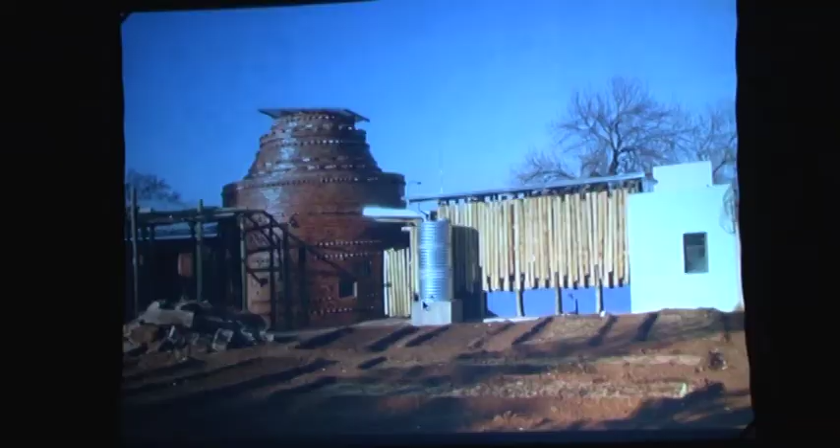And then this brickwork was a very interesting process, where what I did was take images, ideas, etc., and then met with the bricklayers and discussed how we could do just ordinary old stock brick differently. And then they came up with ideas of patterns or ideas of how they responded to that. So the drawing was done, but how it landed up being was ultimately controlled by the makers.

And then the little sort of quiet courtyard from the therapy space, that one sort of point of rest before you go and join the rest of the fray.

Now the women's jail is part of the, it was a jail, and it is part of the constitutional precinct in which the Constitutional Court is. It's called Constitution Hill. So this is a view from, Constitution Hill is conceived of as a human rights campus. So it houses various prisons.

I just want to say that there you see the kind of city. If I show you, that area there is Constitution Hill, with the green houses of the Randlords historically, with this kind of green mass, and then that hill, which is where the prison is and where the old fort is, the kind of watershed of Johannesburg and of what we call the Witwatersrand.

So if we go in a bit closer, that is the women's jail with the new additions that I'll speak to. That's the old fort, which was used.

The English imprisoned the Boers in here originally, but then its later history was that people like Nelson Mandela were imprisoned in this as a prison, but in those are the ramparts. And then that structure over there is the new Constitutional Court, and that building known as Number 4, or historically known as the Native Prison, was a notoriously brutal prison housing black men, mostly political prisoners, and just awful things happened there, but it is now a museum.

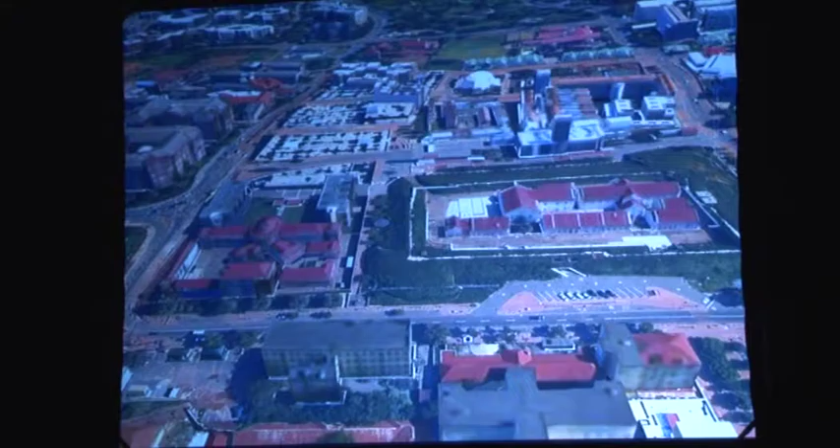So this whole place is the kind of campus of human rights. For example, the Gender Commission and various human rights commissions are housed in these different spaces. What I'd like to do is read to you from Joyce Piliso-Seroke, who is an ex-prisoner. She spent time in the women's jail.

The women's jail is a very strange place because it's described as a fine example of English prison architecture. Now, what a fine example of prison architecture is, is a bit mystifying to me, but nonetheless, as an architectural edifice, it's very beautifully built with beautiful brickwork detailing, etc. But it is better known as a place where women anti-apartheid activists were unjustly imprisoned.

Through this project, the jail is transformed from a place of oppression and brutality to a place where human dignity is restored. So I want to just read to you what Joyce, who was imprisoned there and then later became one of the commissioners of the Gender Commission, wrote, as she then used the office buildings that we designed, inserted into the building.

It is ironic that every day since the Commission on Gender Equality moved to Constitution Hill, I walk through the same entrance of the women's jail that I walked through on that fateful day in 1976, when I was detained under Section 10 of the Internal Security Act.

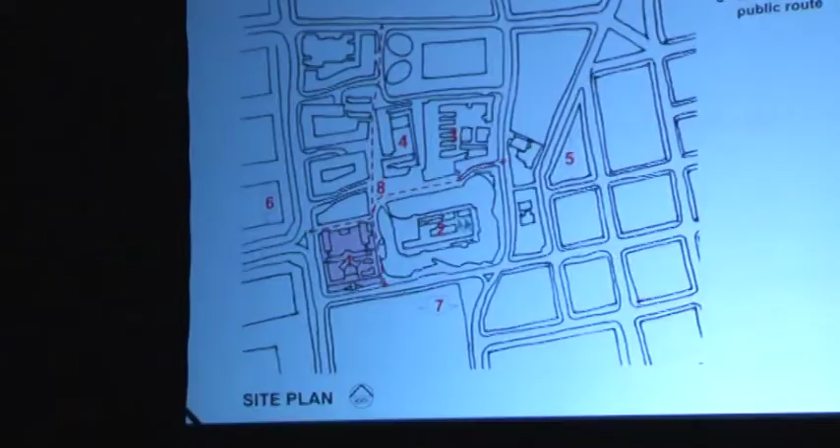So that is a plan of Constitution Hill. There is the Women's Jail, the fort, the Constitutional Court, and these are the kind of major axes through at an urban level.

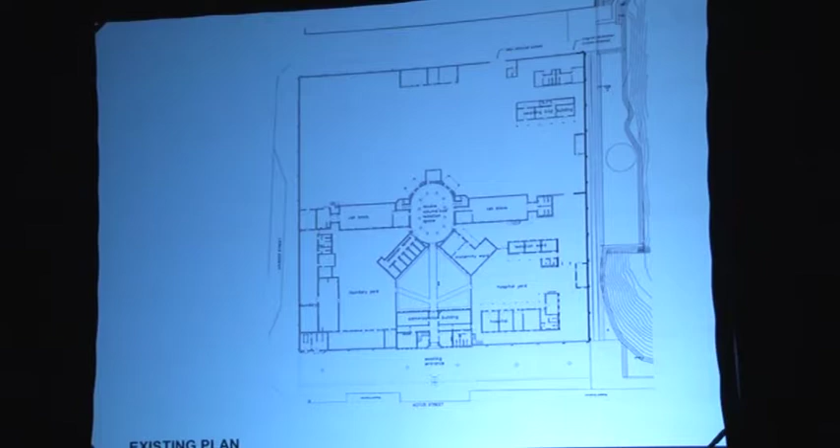Now, this was also one of the important projects done post-94, where there were kind of earmarked key places that were developed as urban regeneration programs. So Constitution Hill was one of them, the Nelson Mandela Bridge, Kliptown, which marked the site where the Freedom Charter was signed. These all became quite important sites of memory and public buildings, though perhaps the public buildings came too quickly. But it was very important to mark these places and use that process to try to bridge that buffer zone, that gap between Soweto and Johannesburg, and connect them into one city. I think it was an incredible time, really, and to work on this building was also an amazing honor.

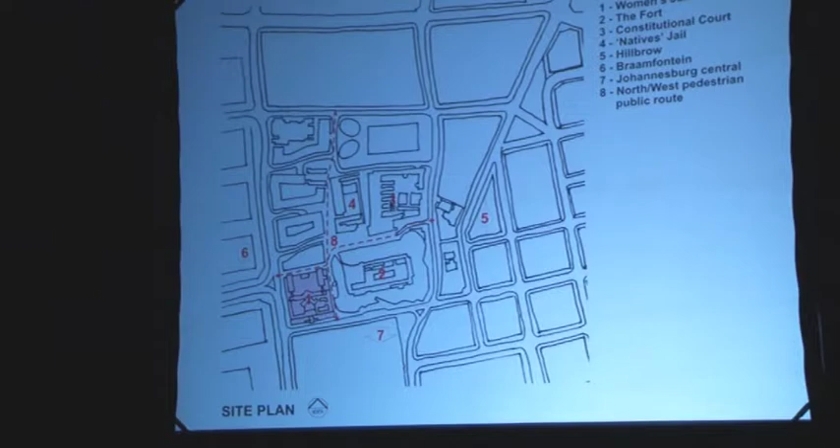So this first slide shows you what was existing, and in a way there was a kind of duality of things going on, where there's this idea of developing an architectural language, looking at a building that was quite beautiful but obviously with a very brutal history. So how one approached that architecturally, and then how that responds to the memory, to the history, to how people felt about it, how women felt about it.

So not to beautify it, not to make it misrepresentative of what that history was. It also wasn't always used as a prison - it ceased to be one before '94. It was used by the CCB, the Civil Cooperation Bureau, who were notorious for their brutality, and then also housed the traffic department, of all things.

So the cells were converted into offices, etc., and this goes to this idea of palimpsest. We removed a lot of stuff and things became revealed.

On this plan, that is the English prison system, where you have the central control with these arms that come out - the next arm would have been built there. We chose to build what we were building not in that pattern, so there's this conversation between moving forward and shifting.

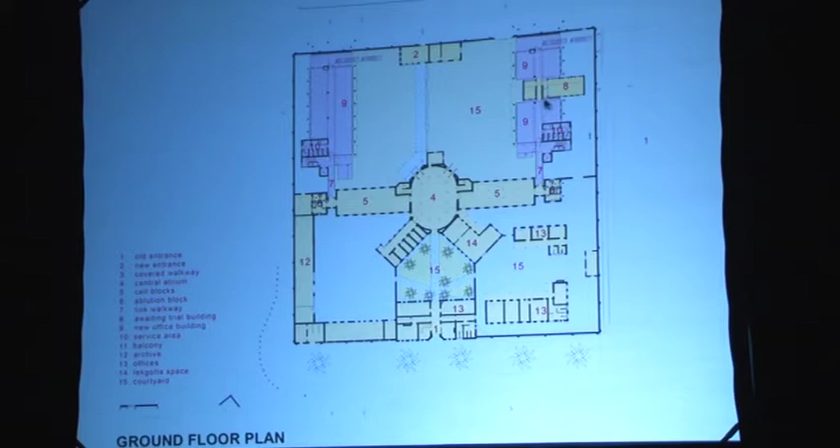That is the old awaiting trial building, and it became pivotal in how the setting out of the buildings happened. Also, this atrium space was always very important and that is retained. So it's a space you move through the cell blocks and into the offices, always this interaction with the history, with the memory.

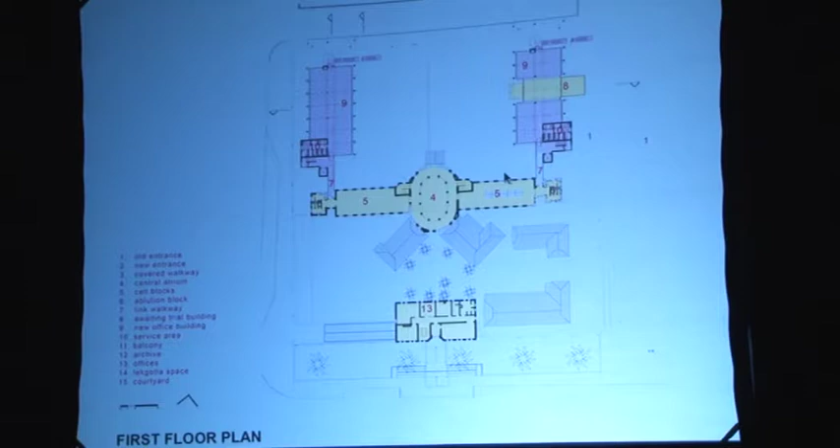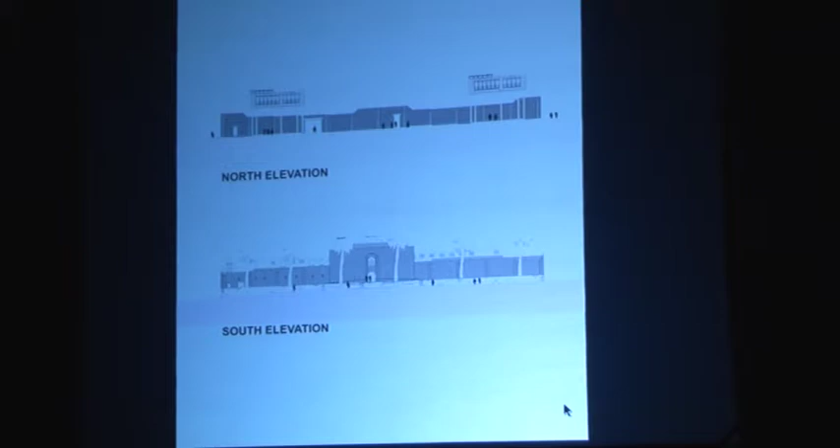That's the next floor up, and then the top floor - did it go? No, there we are, where the buildings actually go beyond the line of the big wall that contains the prison. Very faint, sorry, I'll just move on from those.

Now, in this atrium, prisoners were never allowed to walk in the center - they always had to walk around the outsides, but had to incessantly polish it. There is a collection of the cloths and brushes that were used, as part of a permanent exhibition in that space that explains the history.

And that how so that also is a representation of a cell with the slop bucket, etc. So we worked quite closely also with the people who did the exhibition work.

And then how the new building sort of slips into the old building. And you'll see that the new building uses a lot of glass as well, which also this whole idea of transparency and openness and access.

It also is a building that considers how people in a wheelchair might suddenly need to get out of a fire and not be able to run down a fire escape, which I think, so it's all around making safe escapes and just being respectful on that level.

This here is where the building quite literally escapes, jumps out over the wall, and it's on one of the axes, one of the entries into the campus, into the human rights campus, and you see that. So it was quite a controversial point, but I think an important thing to do.

And I was saying how this wall, when I was growing up in Johannesburg, I was very aware of it, but I had no idea what went on the other side of it. So I think that you start to allude to that is very important.

And so do the fire escapes. These are not the ones for the people in wheelchairs. But that also has a relationship to that wall, so it kind of hovers, and you become aware of the power of that wall to contain, but also that there is something more, that we're moving towards the future.

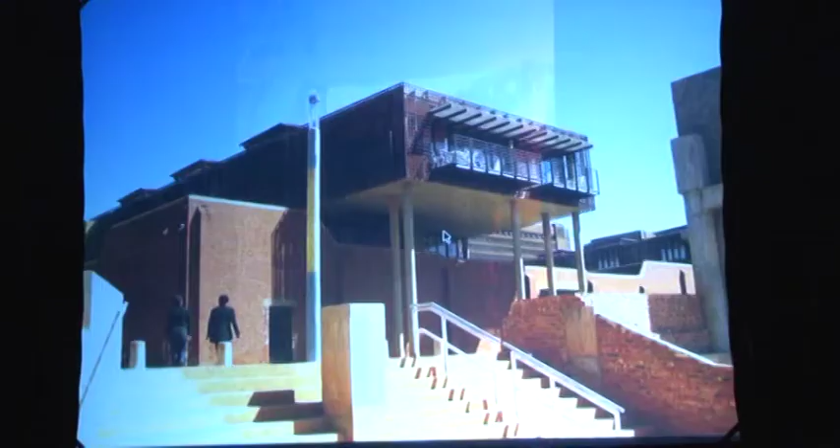And then to talk a bit about these screens. So you will see there, so the idea that the colour and the kind of texture have a relationship architecturally. The theme of these, the motif, if you like, that's used on these screens is a sky, a pixelated sky.

That comes from prisoners talking, ex-prisoners speaking about how the sky was the one freedom that could not be taken away from them. So that became the motif that we used, and then that's pixelated, and all those discs then we used at the lower screens which slide, and that kind of draws a parallel with these tapestries that the women were given to kind of while the time away.

And I think it just makes a very beautiful kind of tracery, that you get that kind of quality of light on the inside of the offices.

And then memory and how it's reflected in different parts of the buildings, and so how you reinstate things. So that was the entrance that prisoners were brought through, so that was reinstated, but a new contemporary piece of glass was put in that.

And then it becomes a thing of layers and of reflection. And that was the opening of the new offices on Women's Day, which for us is on the 9th of August.

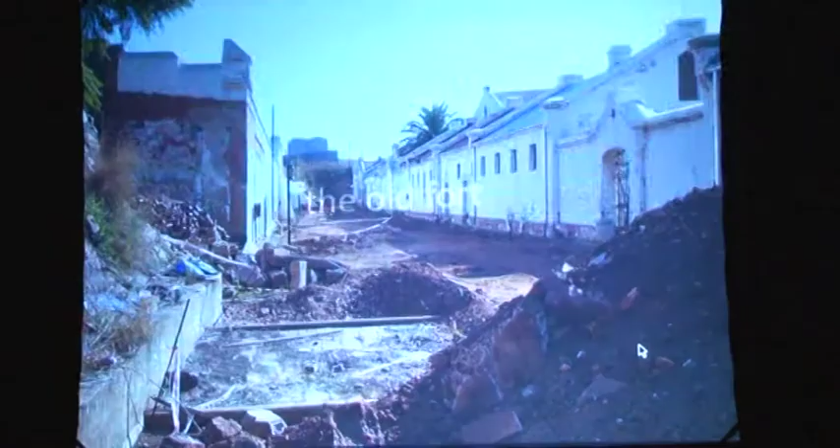And then just looking out from the isolation cells. And then across from the women's jail is the old fort, which we were also involved in.

There was no big insertions of architecture here, but it was around, it kind of stopped the rot, so to prevent the building from deteriorating further, and also to take away layers in order to reveal what was the, these buildings sort of became quite neglected.

And occupied by odd offices and strange things. So it was kind of bringing that back into public availability, but also creating public access.

We didn't restore it. It isn't about restoring it, but it's about kind of preventing it from deteriorating further and then recording the history.

So you can see here in this area, these patterns are brick patterns of what buildings were there that at some point were arbitrarily demolished. But we left them that way, and then this space is used for gatherings and that kind of thing.

And then at another point, which you actually see better over there, a hole was made in the ramparts for access between. So we put this very simple bridge on top so that you can access all the way around the ramparts.

Then to look at what we call International House, which is a student residence at Wits University. This isn't really about memory, but I think it's also about doing things differently and shifting patterns.

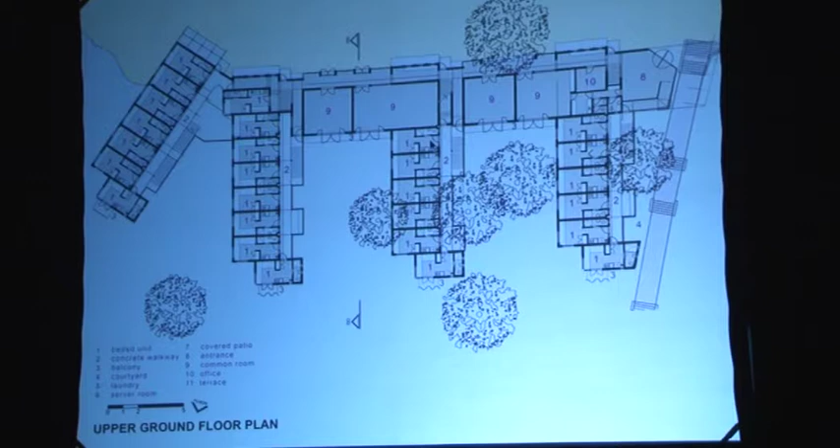Those are the common rooms, so you're always coming past somebody, which you can't see so well here, but you'll see later the stairs work in such a way that every time you go up a stair, you have to move through the building before you can use another stair. So there's always this thing of chance engagement with other people.

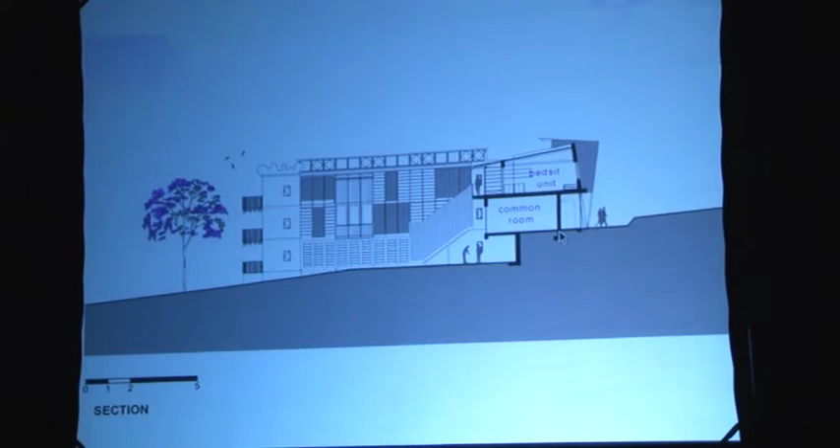And that just shows you the sections. Because of the way the site was, you enter on the middle level, you go up one floor or you go down one floor. And I think that is a very important thing in a lot of this work, the relationship to what is existing, what is on site, and how can the building respond to what is there.

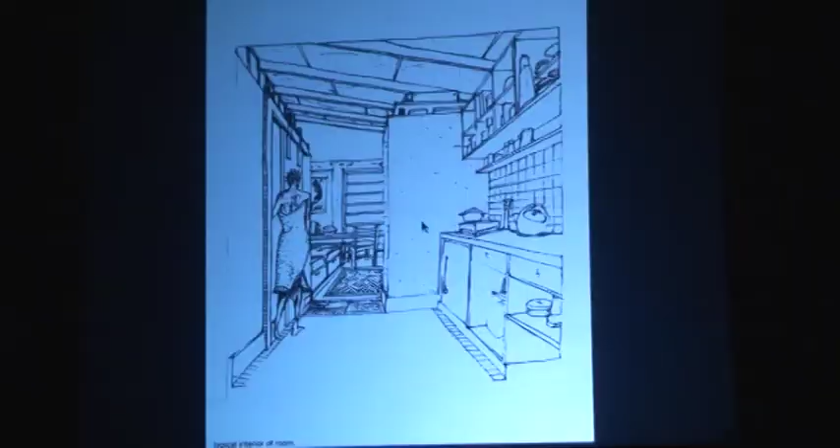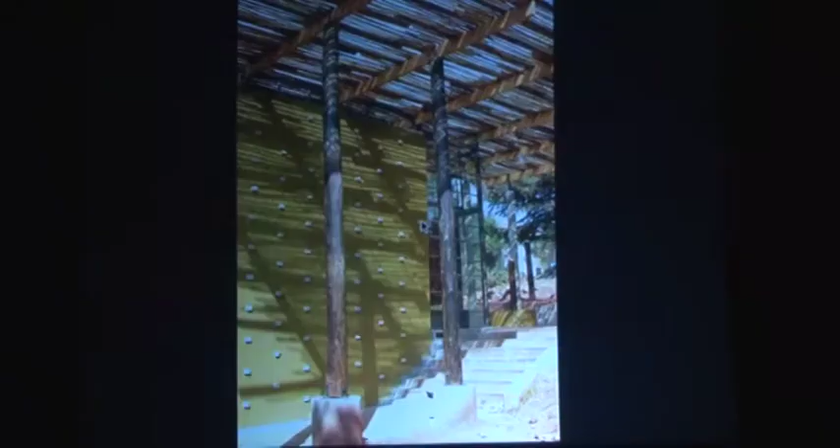So this is the idea of that major walkway that comes right through, being the front door to the student accommodation for international students. And this here is one of the rooms, typically. So there you are with the entrance roof coming out over the public walkway, and from the inside, that's the entranceway.

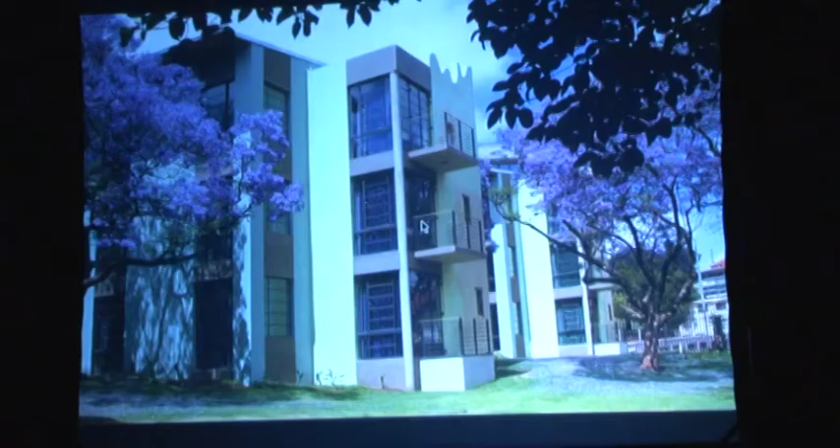Then also quite important to this building was the use of colour. Those jacaranda trees were there, and we could build very close up to them because they have tap roots, so they have a wonderfully close relationship to the buildings. But also their colour is so special in spring, it's just completely beautiful. So the colours chosen were cheerful, uplifting, happy colours, as opposed to these quite grim grey structures that exist elsewhere on campus.

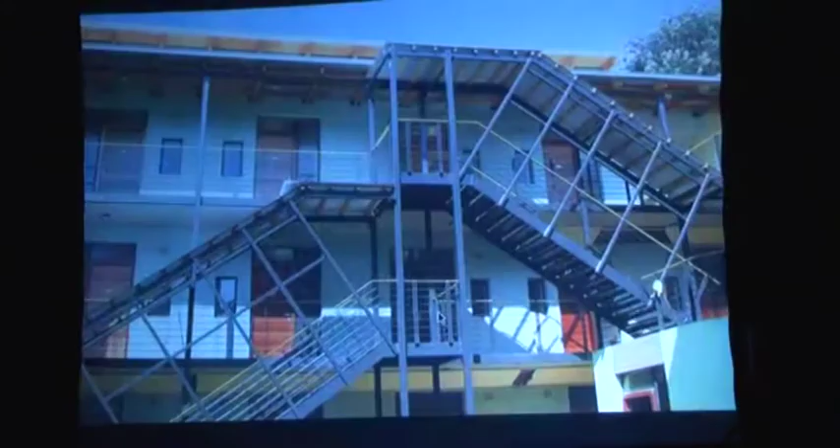And you see there how a staircase is not a continuous thing, but you move through space and then use the staircase again. And outside areas that also are for chance meetings.

So the next project is the Parkhurst shops, which are shops on the high street of a suburb called Parkhurst, and this is historically a residential area. Ostensibly this is the project, but it's two sites - that was a house plus a garage, and that was a house plus a garage.

The whole idea was making the shops very accessible, giving them a face to the street, and very visible. Quite often when you convert a house to a shop, there's an awkward space between where the house ended, the boundary wall, and the pavement. So what we did was take the boundary wall down and move the line of public space right in to up against the house, so that area which would have been private space is now public space, but it's covered with a veranda.

And then these are courtyard spaces, so they're sort of courtyard shops. We've maximized what the town planning would allow us in terms of space, and retained the residential scale, so those three buildings remain three little residential buildings, fitting into the scale of the area, but at the same time becoming very open and accessible shops with this covered veranda that moves along.

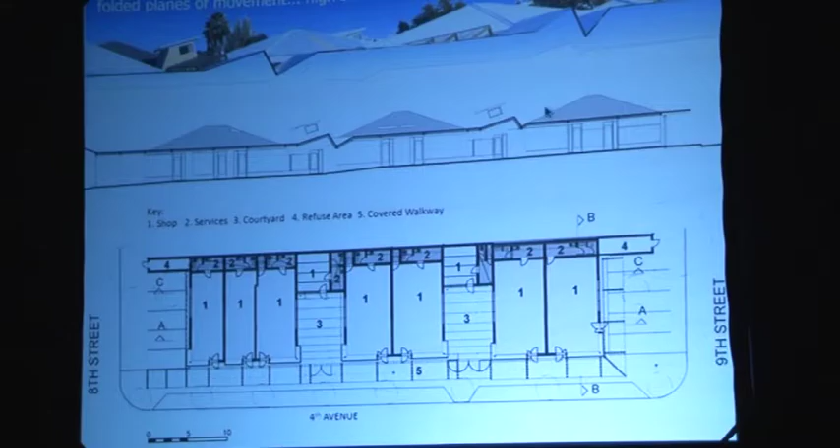So there you see how the covered veranda cantilevers out and brings the line of public access right up to the shop faces. The idea behind that movement is how you might move through a street, so it gives an animation to a veranda space, a covered outside area, and that you can get shade, you don't get wet, etc.

And then the corner shop - that same veranda turns the corner. Where the actual shops are, there are skylights that mark the entrance. The inside of the houses are kind of taken out, and all the trusses that were there, this chaotic spider's web of timbers that held it all up, are painted white and just become this tracery in a way that makes very beautiful light. I love light and shade and how that pattern works.

I also think an important thing that moving the veranda does is - post-apartheid there was also a lot of fear, about closing down and shutting oneself in to be safe, because who knows what's going to happen. But this is the same gesture as the art therapy building, where the reverse happens, so that you invite the public in, and there's a wonderful response you get when you do that. As opposed to becoming more vulnerable, I think you become more accessible and more human. Crime goes down because you treat people as people, not as something that should be excluded.

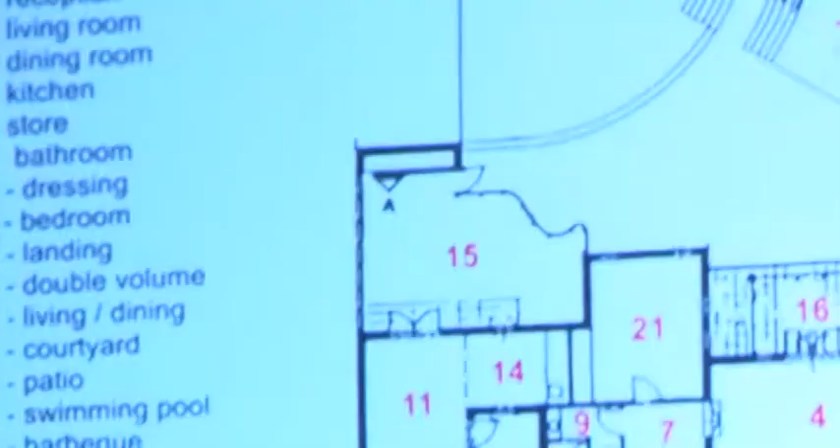Okay, so the next collection of buildings are really private houses. The first of them being House Stari, done in Melville many years ago, on top of the koppie, which is a little hill. It was an existing building, so we start with the garages at the bottom, then the public facilities - the lounge, dining, kitchen, etc. on that level, and then the bedroom areas up at the top. With the idea that you see all the way through, because you're on this highest level and you're looking north or south. That is the house.

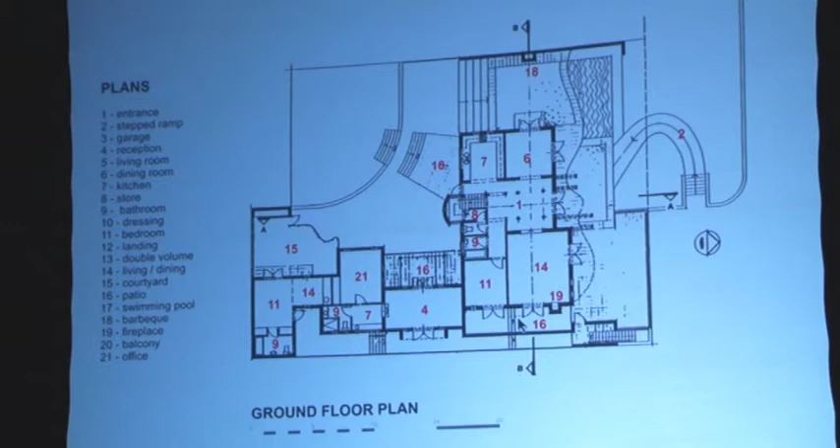Again, quite sculptural - so there you see the space that you look one way, you look through the other way. Also very small scale properties, so to get the sense of volume was very important, and to let light through. There's always this play of light and how light comes in from quite unusual places.

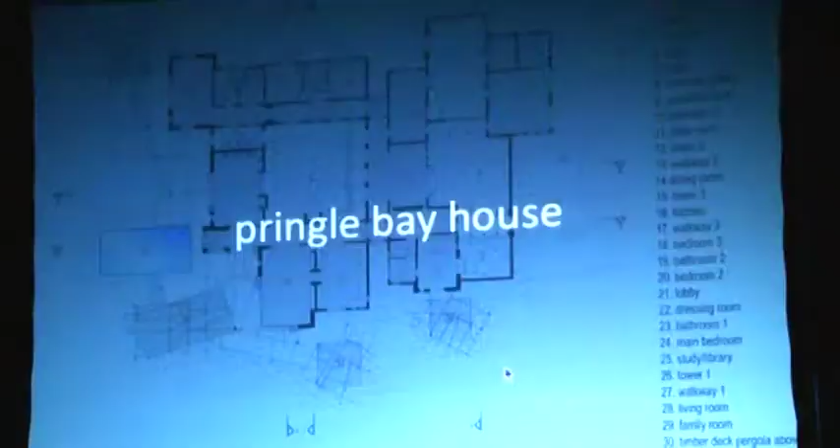The Pringle Bay House, I think it's the one exception that isn't in Johannesburg. This is very much a response to a brief for a very large house, but also it is in an area where when the weather is foul, it's really awful - the wind blows like mad. But when the weather's good, you have the most beautiful views, right on the sea. So the building can open up to the views, but at the same time works around a courtyard space that contains and is safe.

Are alarms going off to say it's time? Or is that just naughty cell phones? Naughty cell phones, okay.

So, for example, that is the entrance, but you close those doors and then there's a covered entrance, almost like a wind block, before you come into the front door, so you're not blown right into your front door.

And then there are these wonderful views that happen. This is actually on axis with False Bay, so you see across False Bay and you see Table Mountain on a really good day, but I didn't have my camera that day.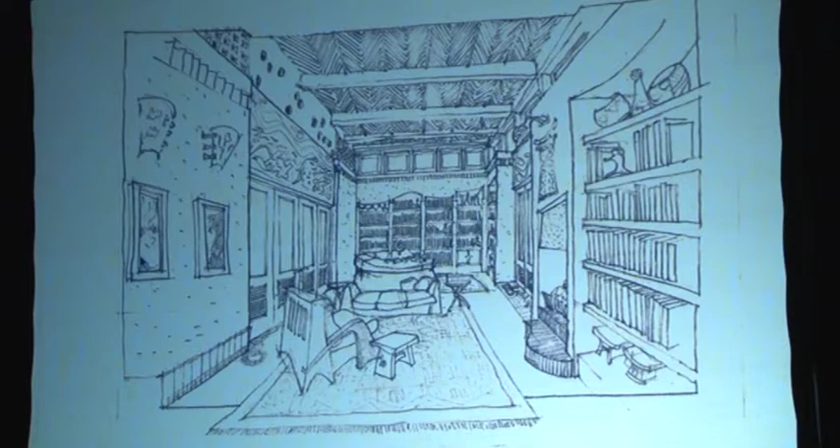What this shows you is also how it's in quite an open area, so the desire to keep the building low, to keep it single story and not a double story, was important, and that these here become kind of markers in the landscape, which is where the corners of those axes happen, and to fragment the building.

I think also what that shows you is the choice of colour was very important, and that stone comes from the site. The idea that it works with the landscape and into the landscape. And through making the different rooms more fragmented, you downscale the size of this quite large house.

So also you see how you see through the building. So at this point, back to the Bay of Pringle Bay. And then those also mark the turning points, but let lots of lovely light through.

And this project was also an opportunity to engage with craftspeople. The client also is a collector of fantastic art, so I engaged also with the interiors of this building. So sometimes a bit like the John Soane Museum, sometimes things were crafted to belong to this house, and sometimes the house was built around what was already part of his collection.

So those were all commissioned, these crazy turned columns. And then you'll see in the interiors how the colours of the works that he had, etc., influenced what was chosen.

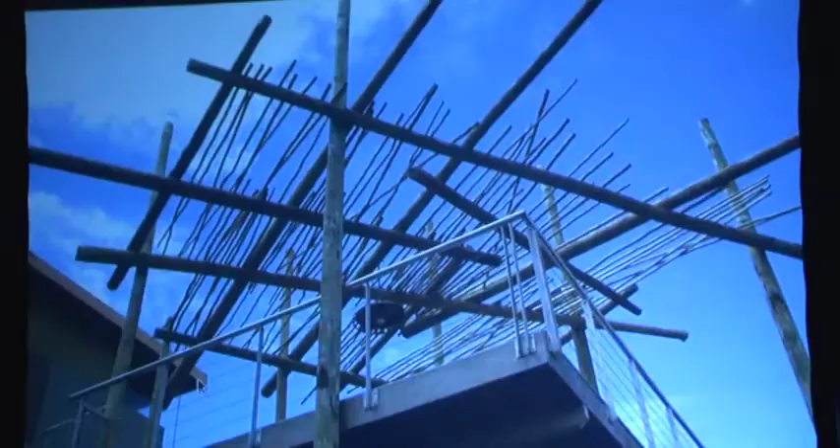Also very interesting for me to learn about, because I come from the Highveld, so I know all about Highveld grass and that kind of vegetation. But to work in a space where you don't get trees, it's much more low shrub vegetation, and to learn to find beauty in it was quite interesting for me. It has this very monochromatic, kind of greens and greys, and then at a certain point it just shoots these most fantastic colours, and you learn a whole kind of respect for that, where I didn't understand it when I started.

One of the things that I really love, and it's particular to Joburg also, was particularly magnificent in Joburg, but we had the most incredible clear sky, and this idea about the sky being the background. If you're sitting and looking up, what things might look like, or how that might act as a pattern on the floor.

So then, the house Otten and Maasdorp is in a suburb of Joburg, and what was very interesting about this project was that they loved that previous house. They'd seen that house and thought it was very lovely, so they commissioned me to do their house. But they brought pictures of gardens - all the images they showed me were of very beautiful outside spaces, courtyards, etc. So there was this fantastic brief that had nothing to do with the building, which I thought was really great.

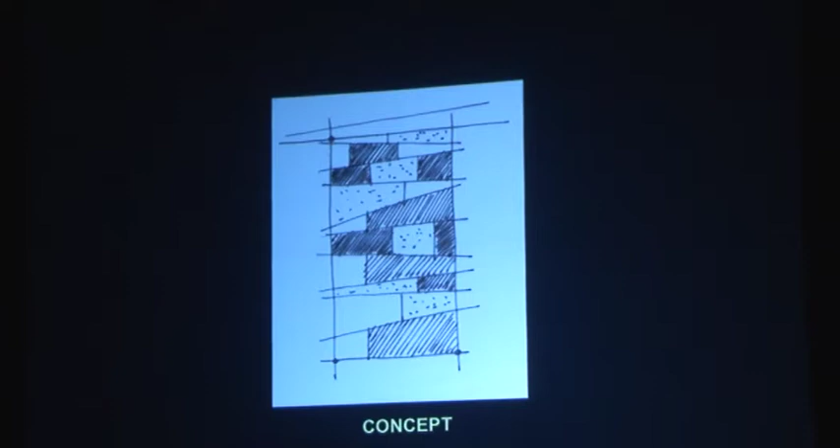And so this is the concept, where there are these sort of shifting planes, and the play between solid and void, and semi-solid, and how that kind of came out in the house.

Also, another large house, but this is the main road from which you access it, and they didn't want this big 'I am house' kind of sign outside, so the main body of the house is brought very much further into the property. It's a large property.

The idea also of creating a courtyard space from which you then - so the entrance is hidden. You don't arrive at the entrance for quite a while. In fact, some struggle to find it, and I think they really like that. That is the entrance over there. And this whole space is the entrance hall, be it inside or outside, and that became the pivotal thing around the parts of the house that hang off it.

And then the leftover spaces become these really wonderful courtyards. So what was a negative leftover space becomes a really positive, wonderful space.

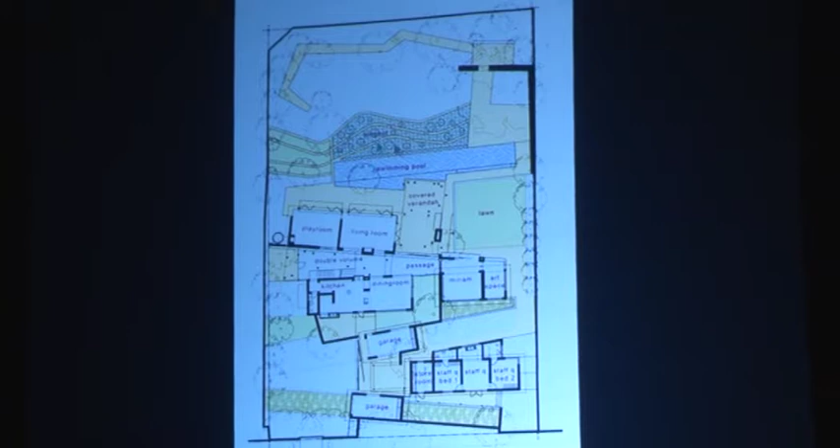A long lap pool, 25 meters long, and then this big stone wall that you go through, and then there's this meander through the garden. And it is a biopool, so all of that is plant filtering water.

That is the upstairs. And you see also with these roofs, again a bit pale, but how they are working in the same kind of three-dimensional way that the plan is working.

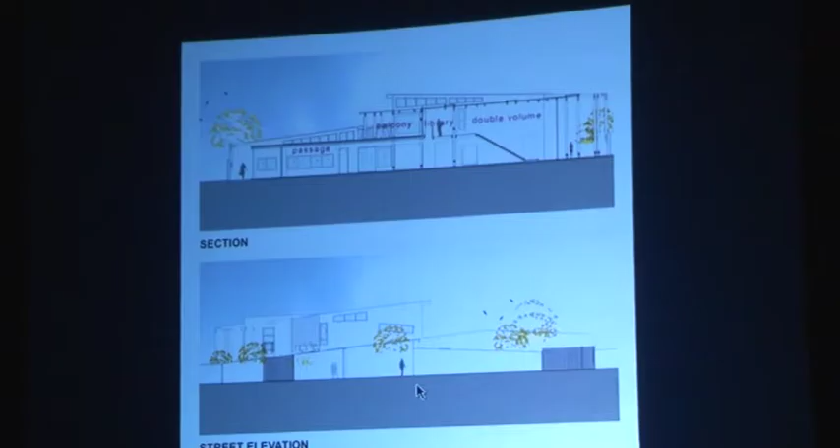So you do eventually find the entrance, and that is it. The idea being that these great big gum poles - you'll see this on the inside - it was also quite a forested house, so the gum poles become more of the forest.

And if you see there, the gum poles come from the outside to the inside, and they're kind of randomly placed, with the roof that has got the rafters also shifting and letting little shafts of light down, much like you would get from the canopy of trees in a forest. So this symbolism of plant kind of follows through in the whole house.

That's looking back towards the front door, and you can see how it just kind of moves straight out, and there's this uneven rhythm of columns and trees.

Looking up again so that you see that canopy with the little shafts of light coming through, or looking down from above, and how these lights - at night time there's little tiny lights there, and then these hanging more leaf-like ones - so that at night you get a similar kind of effect as it moves in and out.

This is a very early picture, so that whole backdrop there is now green. So it opens out into this really lush, gorgeous place. And then here you see these courtyard spaces - you look back towards the front door, and then move from there towards the patio.

Then House Omasori, which is in Johannesburg again, and the client's from West Africa. And how that works is kind of in a response to the idea of where entrance is not axial, so that you enter into a contained space - this is the lower level and the up is the upper level. So you enter here into a public space where you can park your car, those are garages, and then off the axis, so that you can't see in, is the way that you access the house.

And then following up these stairs, you get this main axial space. So it's quite private. So even though the house itself is very axial, very open, with a very clear brief of gallery space and public rooms, lounge, dining, kitchen, playroom, etc., and on this side the bedroom areas, the way that you get there - the public are not immediately invited into the house, you can't see into the house - so there's this kind of layering of privacy.

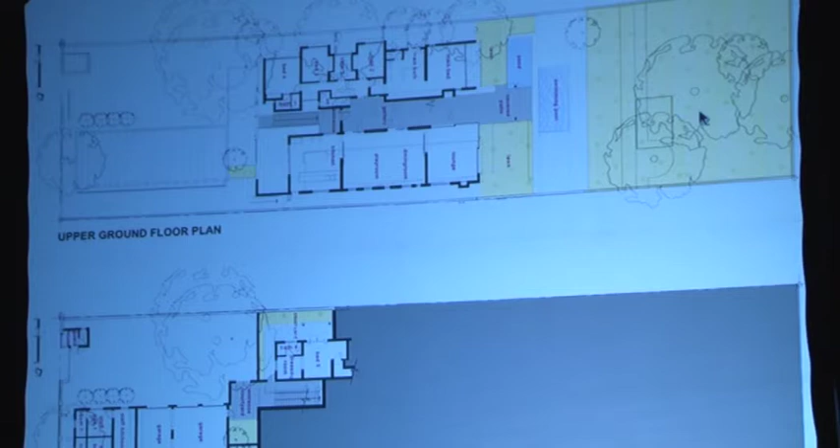This was an existing building as well, so it was kind of rationalizing that into a structure that is quite clean and quite modern. Again, there's a swimming pool over there with its biofilter, and then the trees that are existing there and just grass. So it's a bit park-like, that aspect of the house. And then you see in the sections, but I think again very pale, sorry.

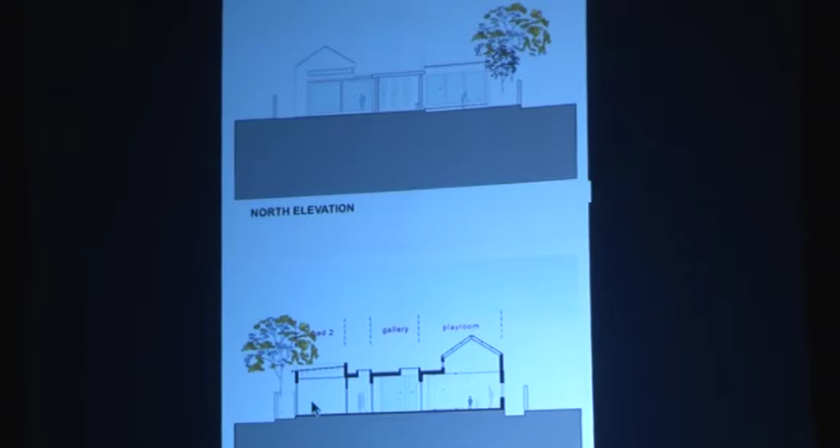What you see there is that the public spaces have got a very high pitched roof that creates a very large volume, whereas the more private bedroom spaces are more intimate and the scale is more intimate.

This is our house - Pizzolidis is my husband's name - and it was a really interesting project because it's where we currently live. He was the client and I was the architect, and we were very strict about that, and no unilateral decisions were taken. It was a fantastic experience, so that by the time we moved into the house, we were both more in love than we'd ever been. And the whole process was just really fantastic.

So it was an existing house, down a panhandle, set in a very lovely, full of trees, very wooded, very quiet, very calm setting.

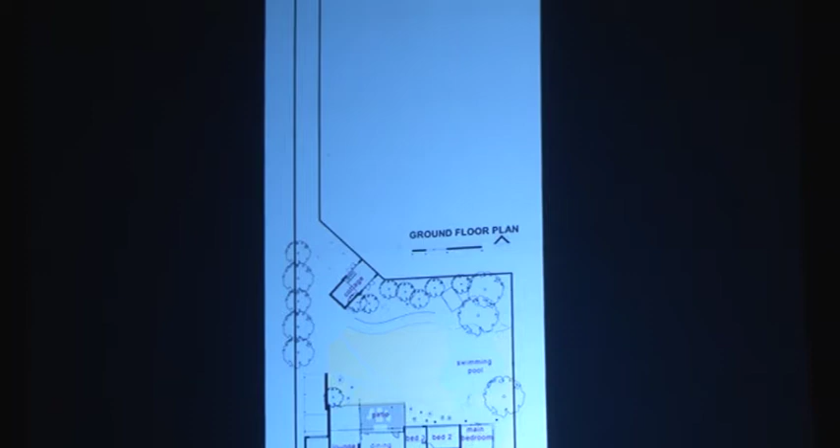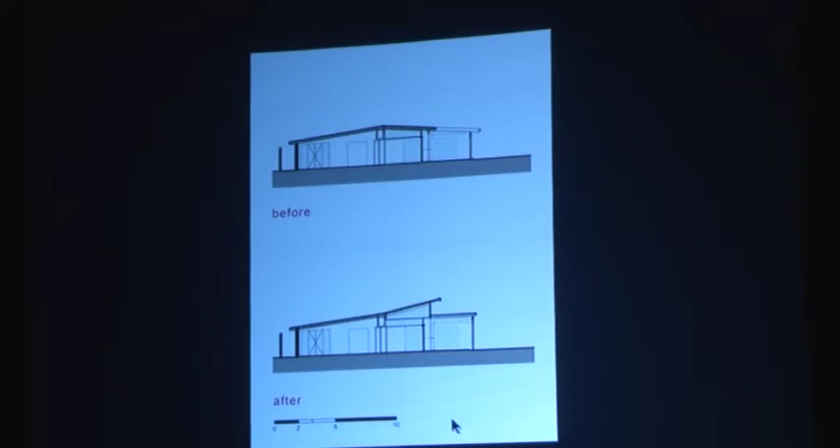And we loved the house, it's sort of 60s with stone and pine ceilings, but that's the original section, so very low, you felt almost a bit squat actually, so what we did was just pop the roof up.

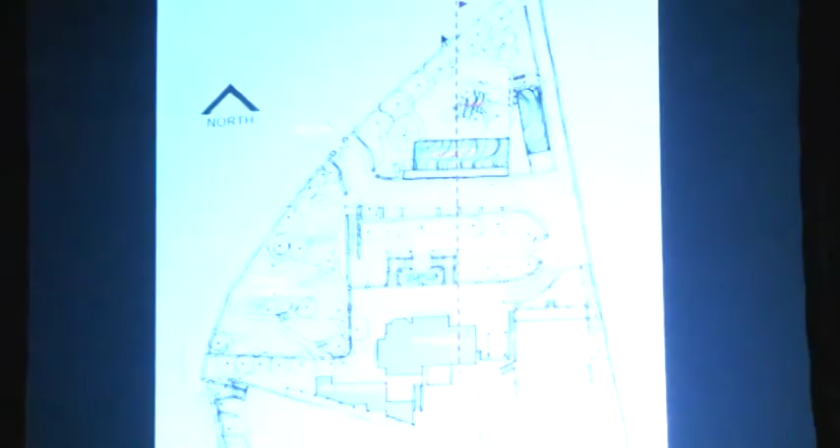Gabriel's Garden Pavilion. So this is the house, this is the site plan, that's the top of the hill that moves down that way. And this is a monument. The house is a national monument, and we did a building down here in the garden.

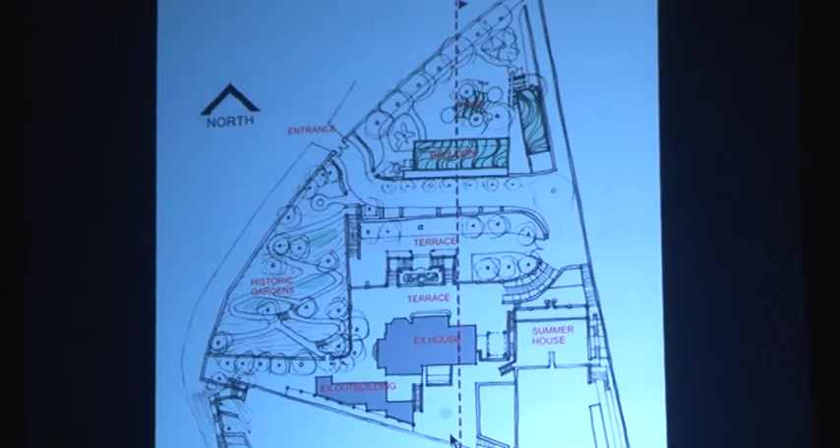And the garden is absolutely magnificent. I'm afraid the photographs don't do it justice, but I always felt that that was very much part of the heritage of this building. So it's one of the old houses of Joburg, not built by a Randlord, but actually built by a farmer from Portugal. That is a section through it.

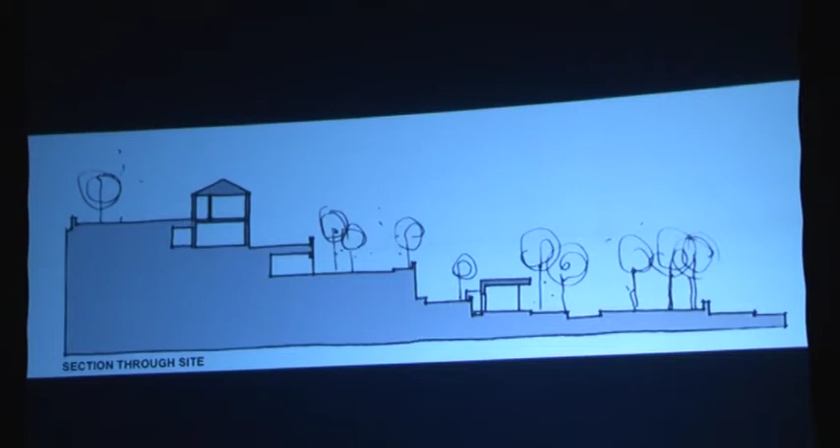So you see the house up at the top, and then those are garages underneath with that sort of top terrace, that the house opens up onto. That's the driveway up, this long sweeping slope. That's the building that we did. We restored the house as well, and you see the extent of the property, an enormous 5,000 square meters, sort of 10 minutes from the center of Joburg. I mean, it's extraordinary. So that's the house which we restored.

And that became quite important in the design of this building, which is in fact a home office for the woman who owns this structure.

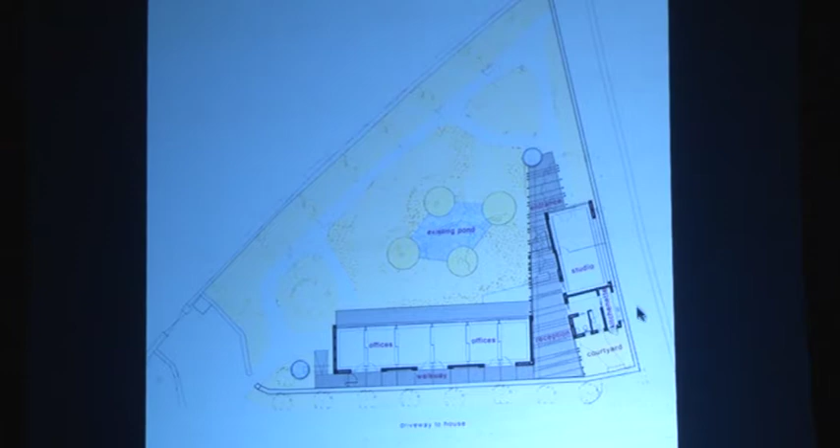And so that is that wall going up, and that is the other one going down. There's the existing pond and the kind of patterns of the existing landscape, into which we added these two pavilions that are then connected, linked, covered, securely, from where they're inside, but retaining that wall, and it becomes very much part of the whole design.

And then the roof of that becomes a pond, which is this whole idea of the fifth facade, that you look down onto it from above. We'll look at that in some greater detail.

So you see the section there where that existing stone wall becomes incorporated into the building, and then this pavilion separated from and kind of floating.

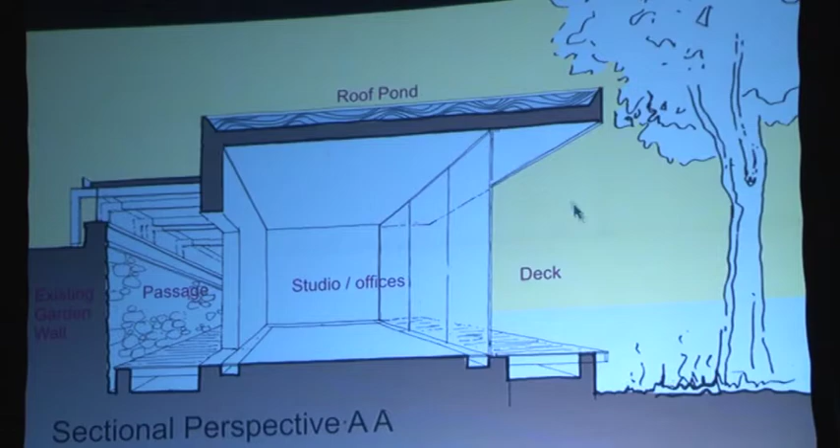So quite a large structure, but what was very important was that you never lost the dominance and the importance of the existing monument up on the ridge there. So the building is very see-through. You can see all the way through to that existing stone wall.

Very open, very contemporary building. Again, lots of north light, this kind of flow directly out into the garden. How the building, again, the tree was there first, so it kind of responds to that.

And then you see there the stone wall, and between the pavilion and that stone wall, a skylight, so that whole area is washed with light.

And so that is the kind of office working environment which is extremely unusual in Joburg. I don't think as unusual here, but definitely in Joburg, and just a wonderful place to work in.

And it all slides open, as you can imagine, so in summer it's lovely and cool, and in winter it's lovely and warm. And then how that rock work, because it's an existing garden wall, obviously it gets wet if rain comes through it, so it just collects in a channel and goes out. So we never tried to make it dry, we just let it be what it is.

The kitchen area, you can see the light coming down there. And then working again with the same kind of water ideas about water and the spout. And that tank then waters the garden, that's moving up the driveway and looking back down onto those.

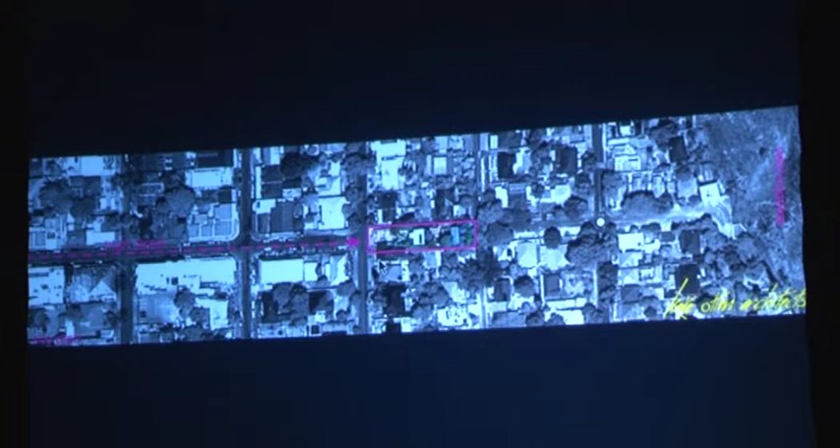So it is in the suburb of Melville. That is the ridge, and it's this long, skinny site. That's the main high street of Melville, and it kind of ends in that. The property itself is too steep to be a road, so hence it became a kind of leftover piece of land which I bought.

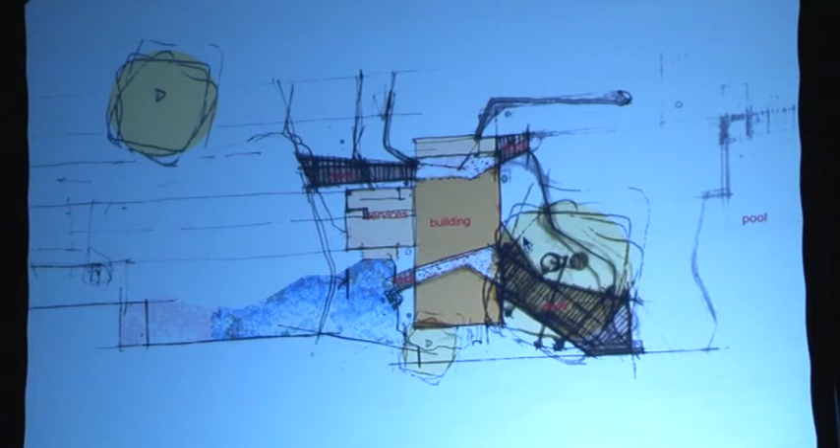And it's very skinny. It's sort of 8 meters up at the top and 12 meters down at the bottom. Some conceptual ideas about how that worked. And then the plans are quite difficult to understand because the site is so steep. So we're going to look mostly only at the house that's up at the top.

So you enter off that axis of the main road and enter into this forecourt of trees and cars and all kinds of stuff, and then over a bridge. So it's very steep. There's this incredible rock face and this enormous indigenous Dombeya tree, and the building kind of slips between these natural structures and looking out towards the north.

So you enter over this bridge. The house itself is a 3-story structure. We enter on the middle level, which is living with a kitchen that side. That's the staircase that takes you up and down.

Or you go up a level, which is sleeping, with 2 bathrooms, kind of differently divided according to who's using it. Or you go back down to the lowest level, which is something, again, a sort of big public living area with its own bathroom and a kitchenette on that side that opens out onto a patio.

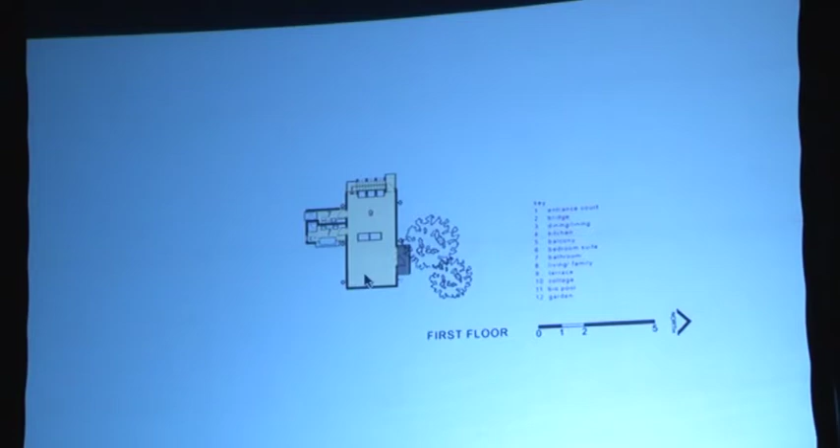And underneath, sorry, that is the upstairs again, sorry. Oh, I'm going backwards, sorry.

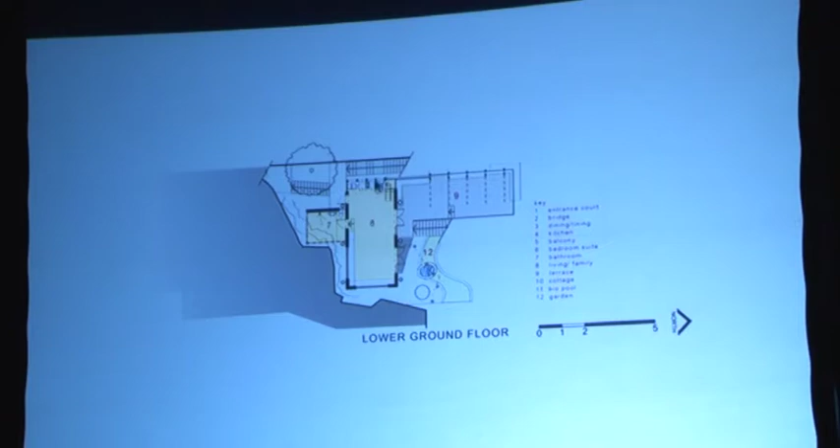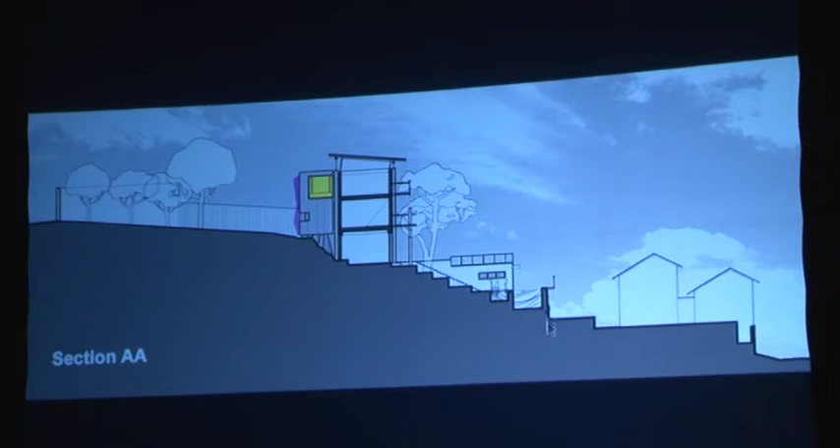There we are at the ground level, lowest level, the sort of cave-like level that opens out onto a patio with a cottage underneath it and a swimming pool at the end. All very complicated, but if you look at that section you will understand it. So that's the level of the top road, and that is the level of the bottom road where you enter that house. From the top you enter into the house that I lived in. That was my studio for a while. And then down here is the swimming pool that becomes the edge that retains. Oh my golly.

If anyone has any questions to ask, please.

I'm wondering if you could talk a little bit about the process of designing some of the houses, and where do some of these detailed flourishes come from? Do they come while you're on site? Where do some of the more fanciful details come from? Do they come while you're working on the site with craftsmen? Do they come during the design process? And how does that work itself out?

I think that they come in different ways on different projects. Do you want to be specific about what detail? Because I really do think that at different moments it's quite a fluid process. As I'm now a mother of a child, I have less time to fit everything in, so I spend less time on site than what I used to. I think the buildings, there's a lot more work that happens in the office now than what used to happen before.

A detail can often happen in response to what is perceived to be a problem. Things happen quite quickly. You'll go out onto site with sort of 1 in 50 drawings, not very detailed drawings, and then you'll bump up against issues, and that's, I think, the most often times when things are resolved and when details arrive.